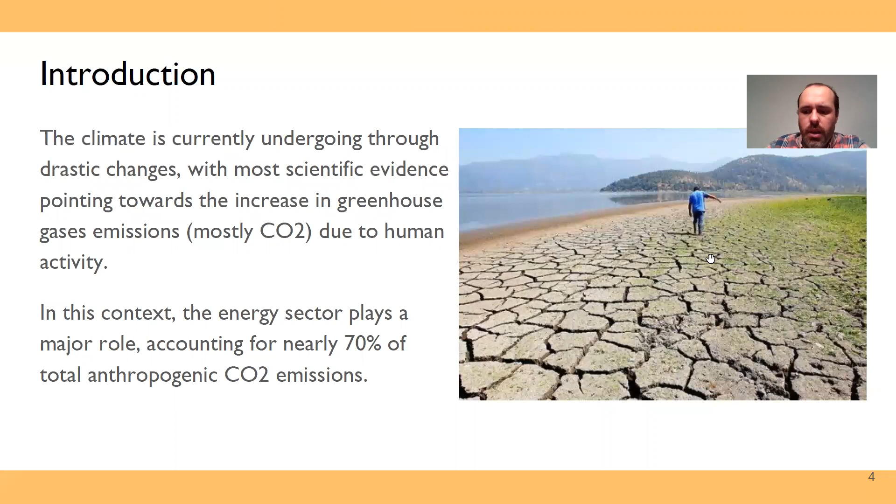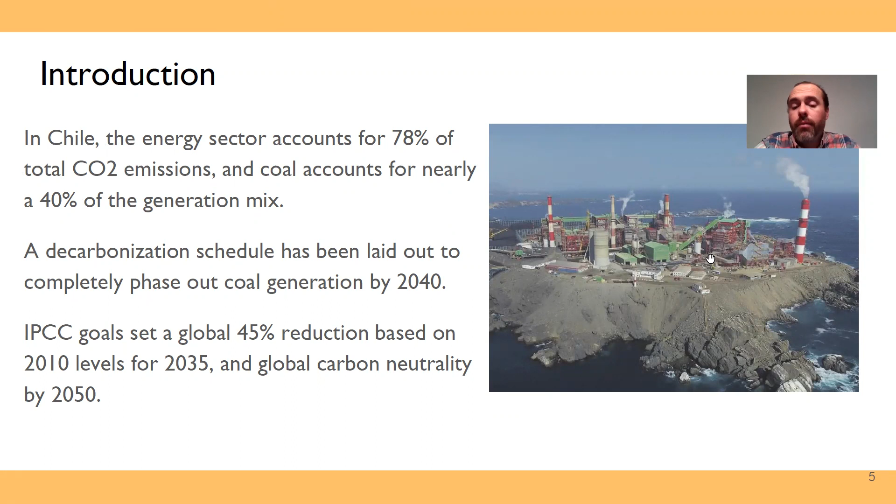The context of this talk is what we're experiencing right now as a world with climate change, and ever more pressure on our energy systems. Many power systems across the world are starting decarbonization processes. In particular, in Chile, we already have a compromise for removing all coal electric power generation before 2040, and other countries are raising similar goals. This sets a very interesting and challenging setting for the power system, because as we remove coal, we want to have more and more renewable power.

In Chile we have very nice natural conditions for both wind and solar power. The main problem is that as we remove this controllable and dispatchable resource, which is coal, we start increasing the presence of variable renewable energy sources, wind and solar power. This produces pressure on the flexibility requirements of the power system, and on what type of flexible technologies we need to deploy throughout time as we go along removing coal and increasing renewable sources.

So this is basically the challenge we face in this study, which we try to analyze and understand.

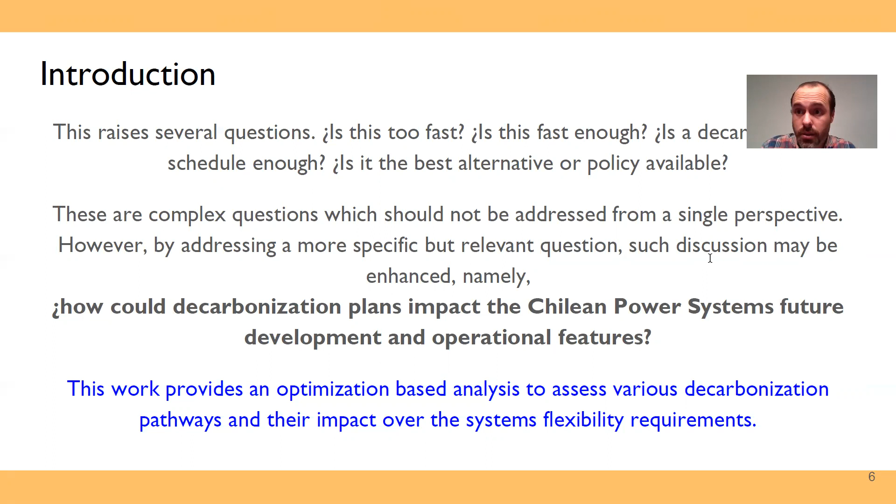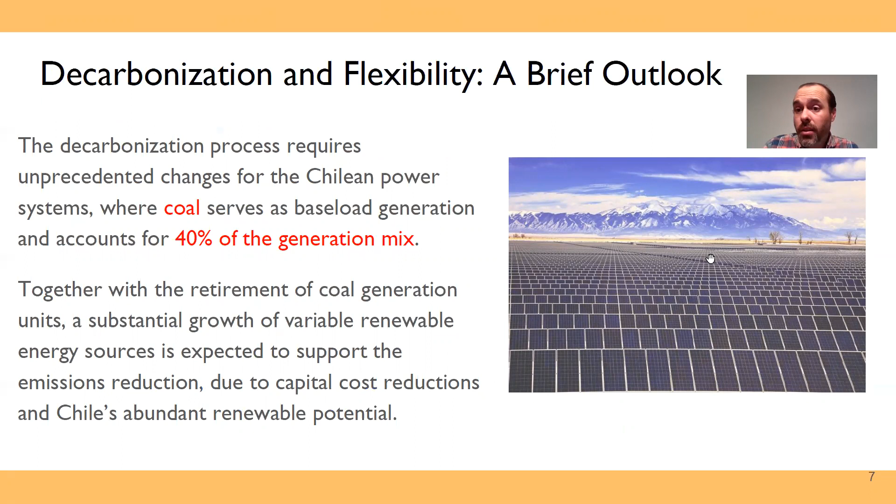Just a bit more context: today we have about 40% of the generation mix coming from coal. So going from 40% to zero in 20 years is quite an important change in our system. Again, the concept is flexibility, and a key role is played by storage systems.

Not only batteries or hydro resources, which we do have in Chile, but also this beautiful technology which is concentrated solar power, or CSP. We are currently building and under construction a CSP plant in our system. This is a very nice technology where you can use solar power throughout the night and store power through thermal processes, in a completely renewable way.

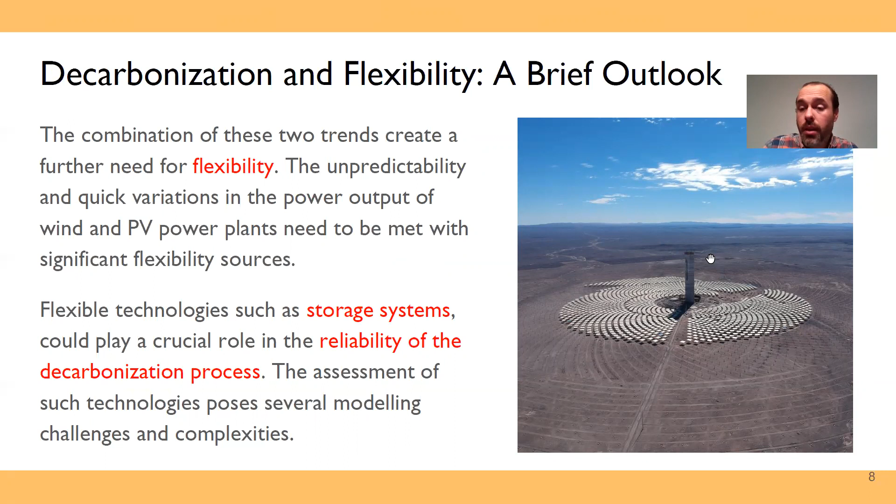A little bit on our methods, models, and data in this study. Our main tool for studying this problem is using expansion planning models.

The basic idea of this type of model, and what we do in this study, is to look at the Chilean power system throughout a 20-year horizon, from 2020 to 2040. We need to look both at the investments carried out in these 20 years and the operational costs needed for satisfying all the demand from the power system, while satisfying various physical or operational constraints.

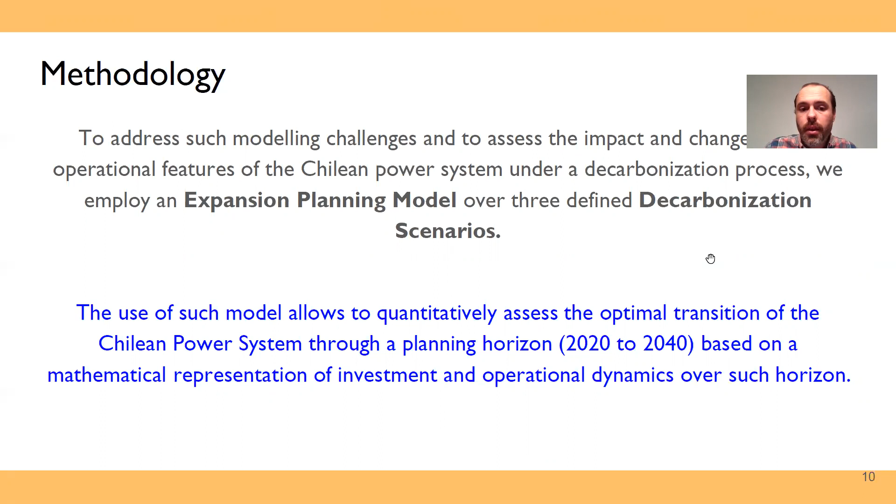The idea is we want to minimize the total cost of investments plus operation, such that we satisfy demand and meet a series of environmental or policy constraints, namely that coal has to go to zero in 2040 with some trajectory. As I mentioned, we currently have a schedule for removal of coal, and this is at least the plan for the first 5 years, which removes about 25% of coal capacity in megawatts.

We also study three scenarios: the current Chilean compromise of completely removing coal by 2040, which we call D40, or decarbonization by 2040. We also look at D35 and D30, which is decarbonization of the coal part by 2035 and 2030 respectively.

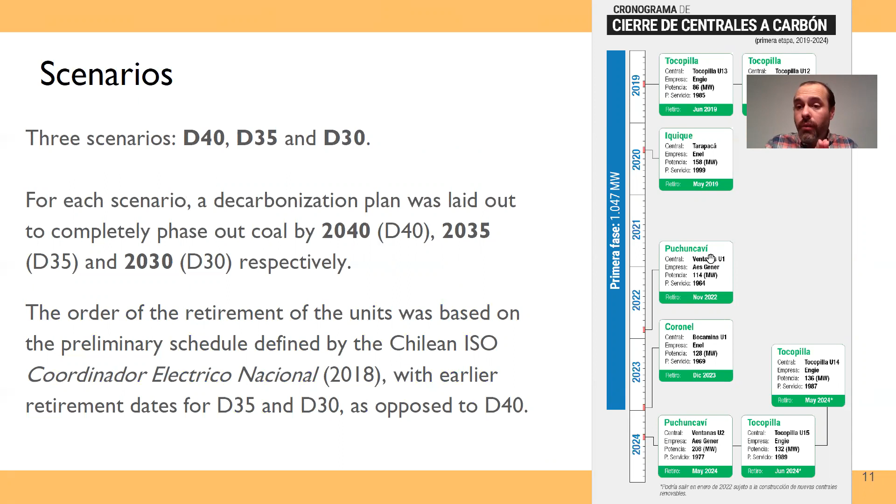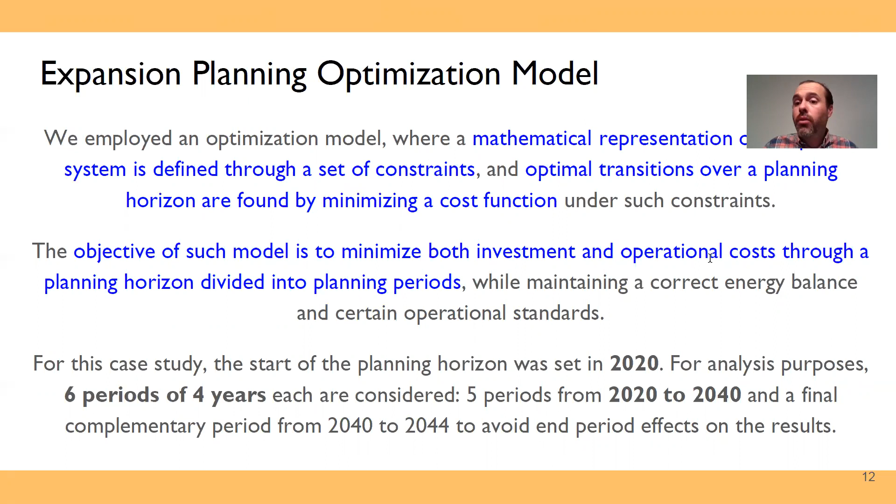We employ 6 periods of 4 years in this case, so we plan until 2044 just to have an additional 4 years to avoid end-of-horizon effects. As I mentioned, the idea is to decide where, when, and which technology capacity investments to carry out for this horizon, also looking at operations.

We built on previous work by ourselves: Meda et al. 2019, also Maluenda et al. 2018, and also a paper by Hua and Baldick from 2018, which we use to improve the modeling of our operational representation of the system, including some flavor of unit commitment.

It's really hard to capture a full unit commitment model in a planning problem. However, there are some techniques that allow us to have a reasonable relaxation of such constraints, which is key for understanding the flexibility of the system a little better.

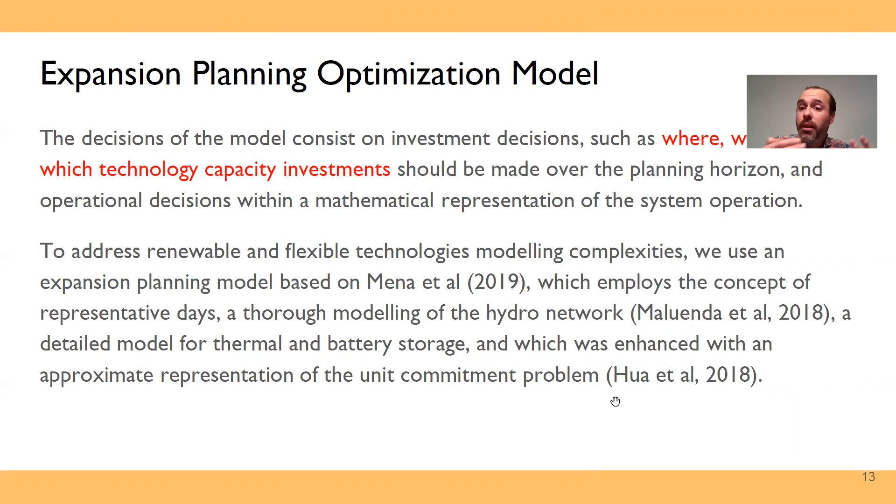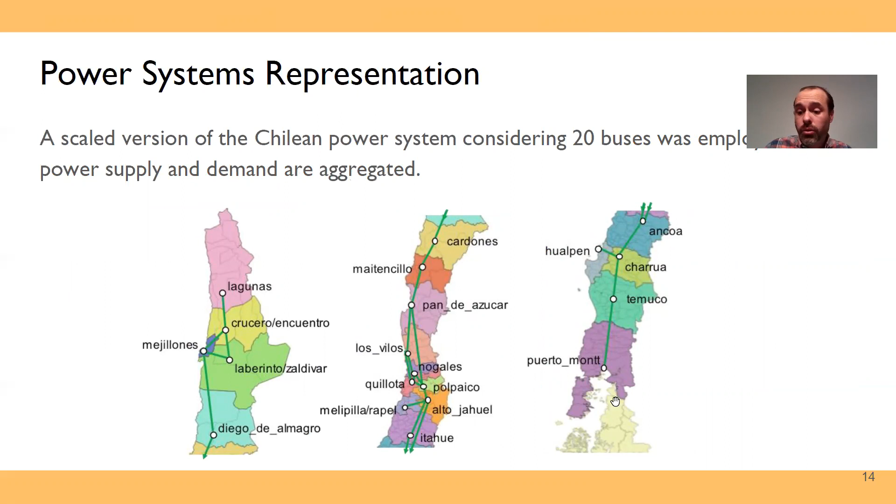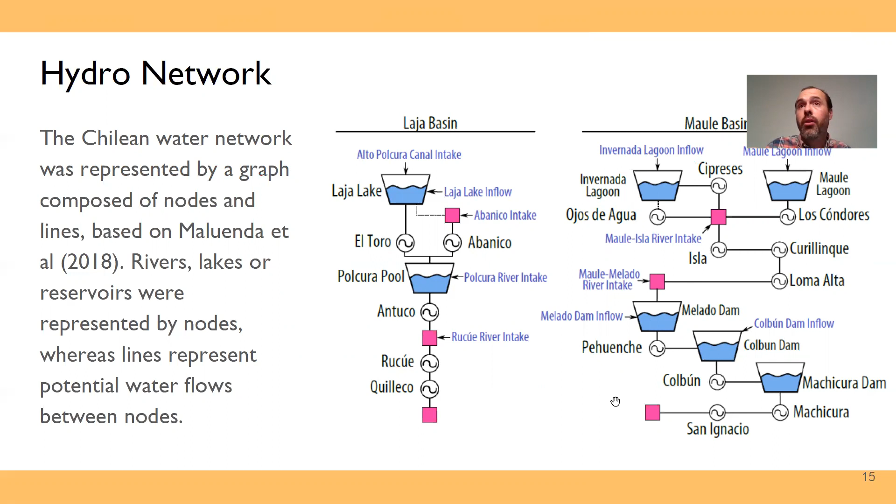This is our representation of the Chilean system with 20 zones and about 20 or 23 transmission corridors for power. We also have a quite detailed representation of the hydro network with hydro corridors, reservoirs, and so on, looking at dam hydropower generation and also run-of-river hydropower generation.

Our approach for understanding the flexibility of the system and representing the operations of the power network is to use, in this case, 6 representative days. The idea is each planning period, which has 4 years, is represented by 6 representative days.

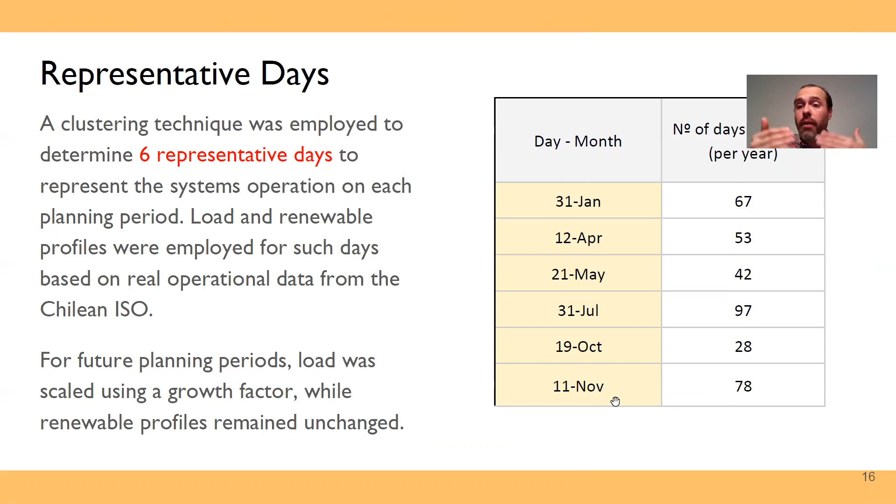The information in each of these days is a wind power signal for every zone, solar power signal for every zone, load power signal for every zone, and also hydro availability wherever there is hydro. All of this goes into selecting the 6 representative days. We could use more days, which would give us a better operational representation, but we've seen that this is good enough to capture the main effects on the investment decisions.

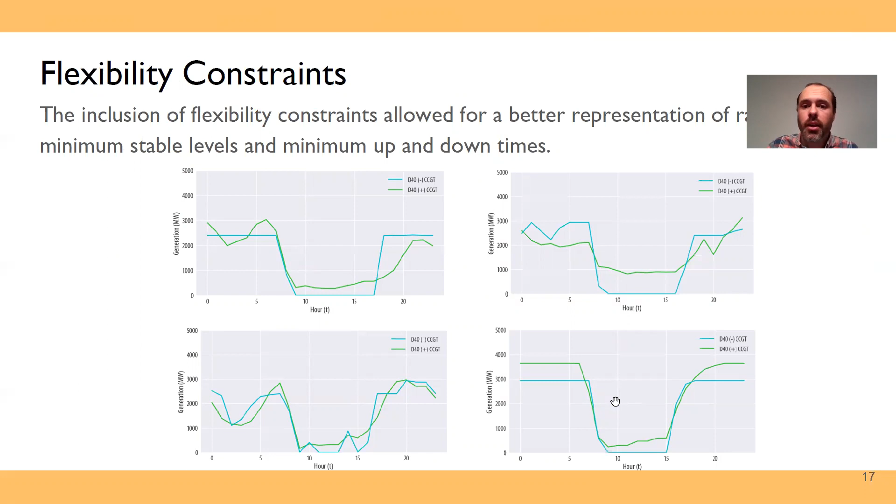As I mentioned, there are some flexibility constraints from Hua et al. 2018, which allow us to capture some unit commitment effects in an approximated way. There's a lot of other data that goes in, and our environment for modeling this uses Python, Pyomo, and the Switch model.

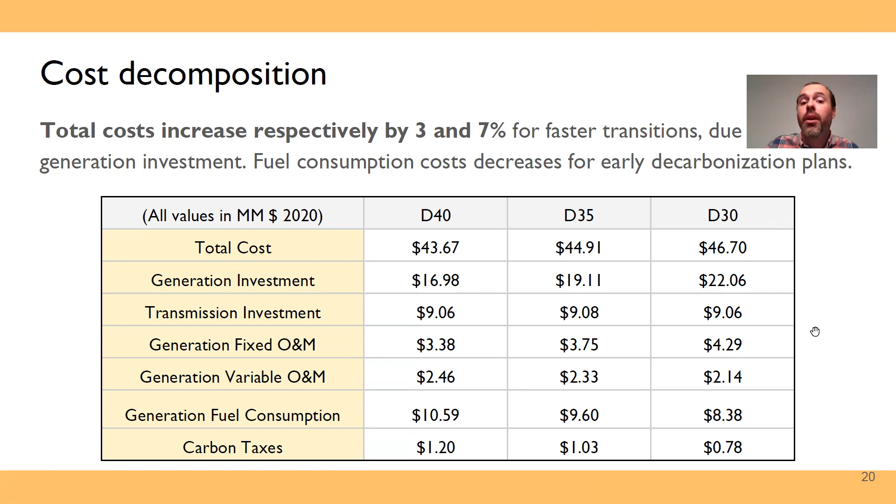I can't go over all details, but what this table tells us is that D30 is basically carrying out a lot more investments than D40, because of this tight deadline for coal generation, which is 10 years earlier than D40. This is the capacity mix throughout the whole planning horizon.

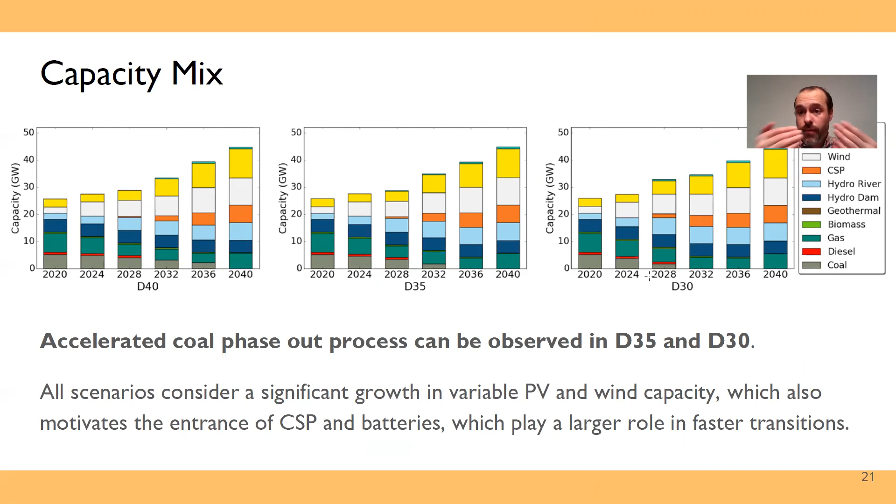The final capacity mix is not too different, but the trajectory is a little different, as I mentioned before. In D30, you have to carry out a lot of investments early in the planning horizon, as expected.

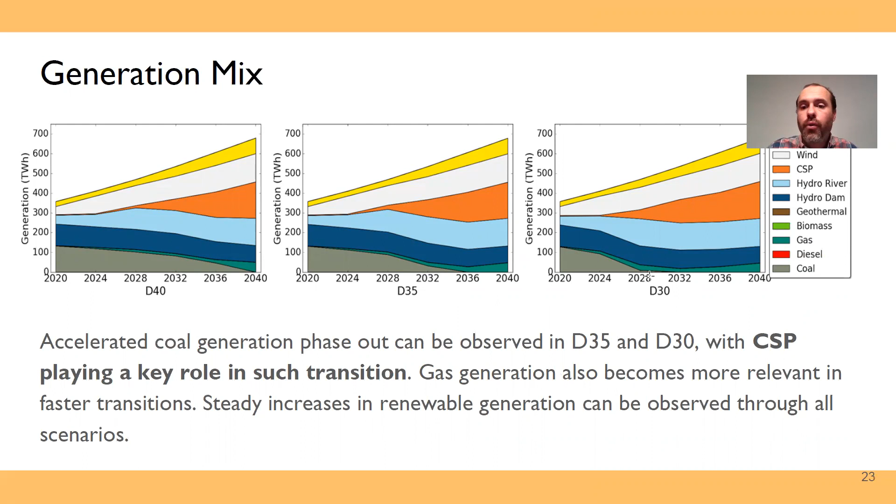Again, this is actually the same idea here. Some interesting things - this is actually the generation mix now, not capacity, but generation in terms of energy, and CSP plays a very important role in all of our scenarios. And of course, CSP comes in a lot earlier in D30 than in D40.

As I mentioned, the final generation mix is not too different for the three scenarios, and there are some key takeaways here. This is the current mix in 2020, very similar to what we're seeing these days in our system, and this is the 2040 mix. We see a lot of CSP, more than a fourth of the power generation, much more wind than today, a little more photovoltaic than today, an important role of gas, an important role of hydro dams but much less than before, and a more important role of run-of-river hydro generation.

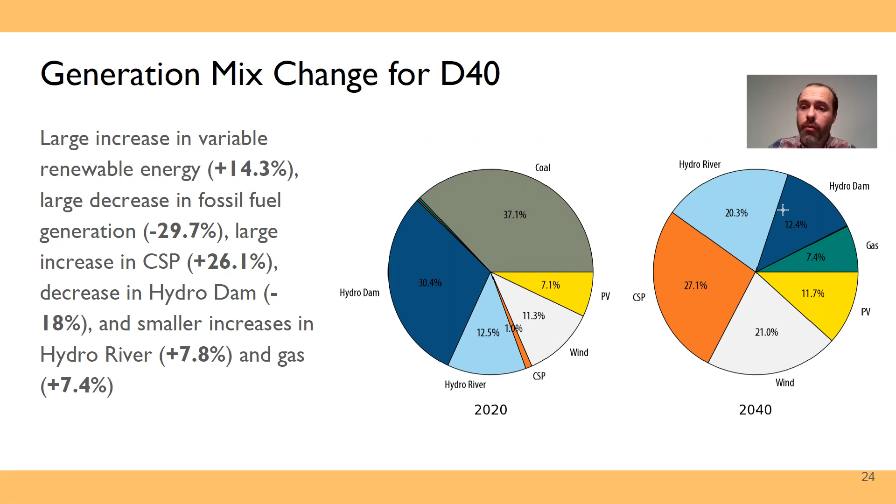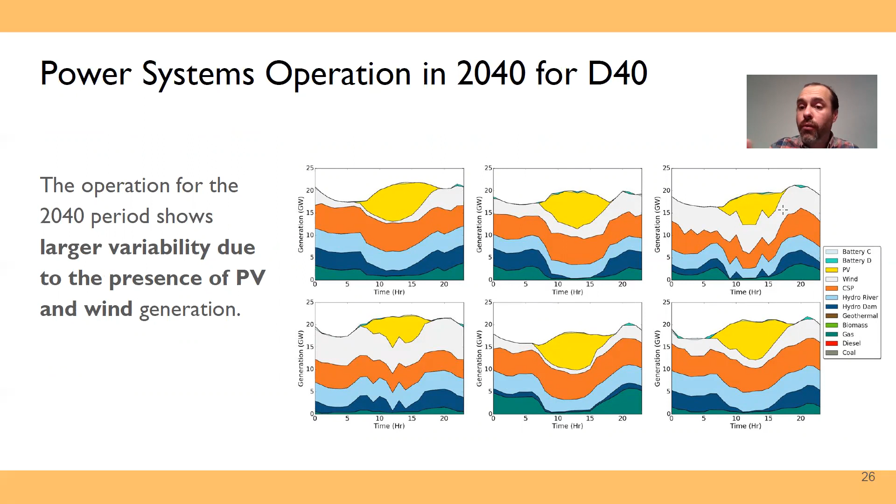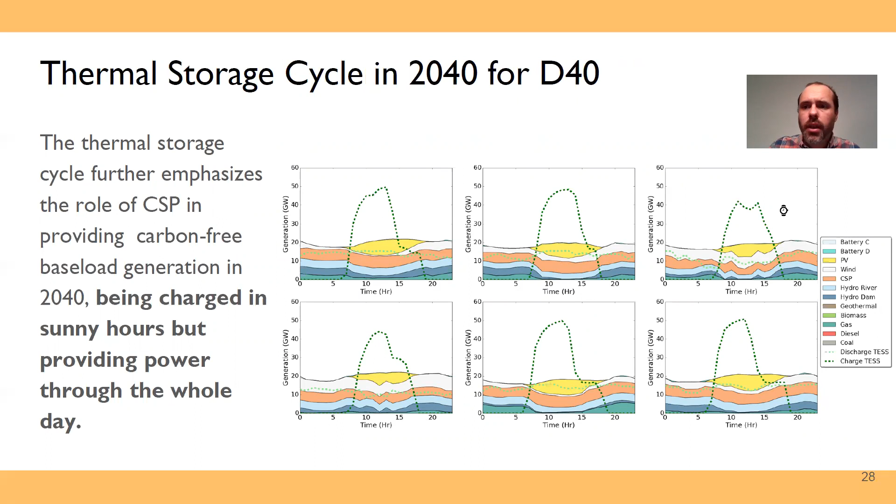This is what CSP does throughout the day. I don't have time for details here. These are emissions - of course, emissions go down a lot. Emissions today are mainly from coal generation. If you assume that there's not too much gas, the usage of gas these days depends on the prices.

So we do see some gas today in practice. It's not represented here because of the cost structure we employed, but we see that in 2040, basically all of the CO2 emissions come from natural gas.

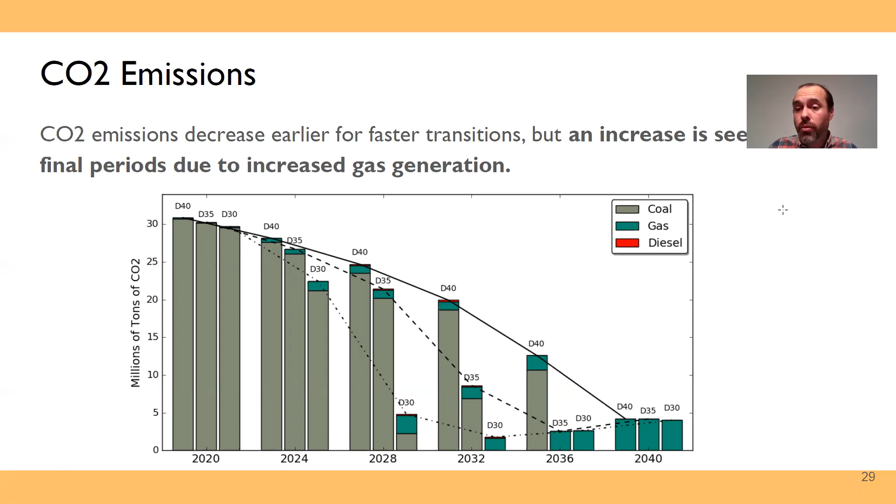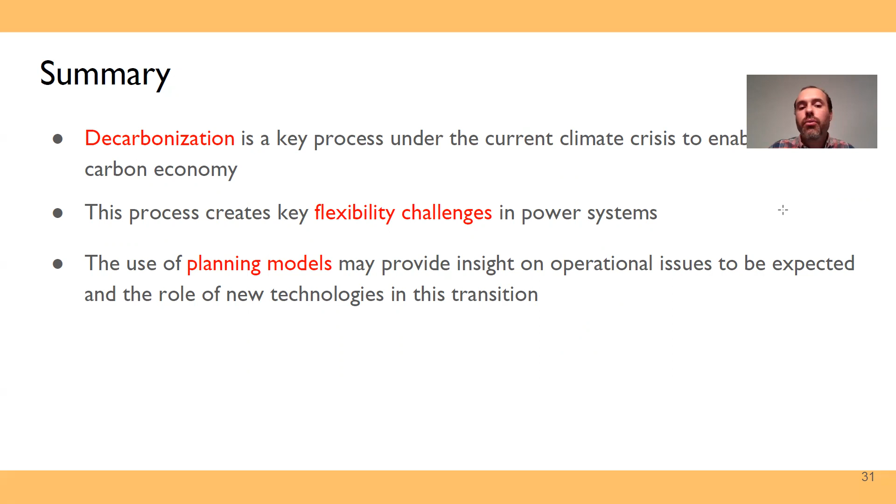Just some conclusions. Decarbonization is a key process under the current climate crisis, and we need this to enable a low carbon economy, or hopefully zero carbon economy sooner than later. This process creates key flexibility challenges in power systems. As we remove coal and increase wind and solar, we need to take good care of flexibility in the power system. The use of planning models may provide insight into operational issues to be expected and the role of new technologies in this transition.

That's basically a summary. Now, some conclusions. Under all scenarios, there will be a lot of variable renewable energy in our system, and flexible generation technologies such as CSP. I didn't mention batteries too much, but we do see some role of batteries, though much more important is the role from CSP as a flexibility provider, and also gas as a flexibility provider, natural gas.

Accelerated decarbonization processes will naturally present higher costs for the overall system and thus for society, but the benefits of this might be significantly more important than those costs. So that's something every country needs to bring into the equation and see how fast we should remove CO2 emissions. And finally, the increase in CO2 emissions in final periods should be addressed through a more comprehensive policy.

So removing that percentage of gas that we see in 2040 will require a more important role from these flexible renewable technologies, say CSP, batteries, and even hydro. And that's something that can be done. We see that gas is not playing a huge role by 2040, so bringing the system to a zero emission power system might not be too far away from 2040.

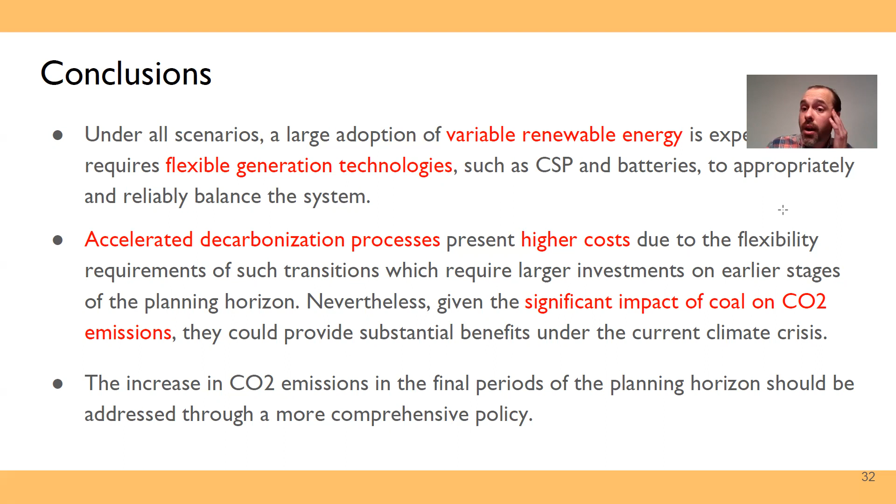This is particularly important if we want to decarbonize the rest of the economy, or the rest of the energy system which is not electric. We will need to electrify a lot of those consumptions of energy that are not electric, say cars and so on. The effective placement of flexible resources is a key point.

I didn't have time to go over where these technologies are installed, but this is a key thing in Chile, where we have a lot of hydro in the south and a lot of good solar resource in the north. So it's really important where you install flexible assets. Some more comments here along the same line.